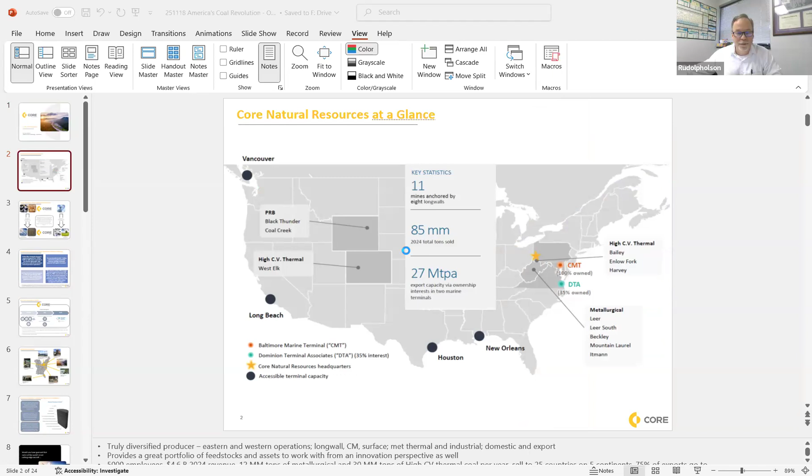Nothing's moving there. The blue wheel went away. Why don't you try hitting that presentation mode button down on the bottom again? See if it pops up. There we go, now we're caught up with you. We're on the Core Natural Resources at a glance page. Sorry for the interruption, I'll notify you as we go.

So as I mentioned, you can see here on the map: Pennsylvania, West Virginia, the ports in Maryland and Virginia, we have Wyoming and Colorado, and also some ports in Vancouver and Long Beach, Houston and New Orleans as well. Accessible terminal capacity there.

So for us as the innovations group, it really helped broaden our ability to access different types of coal, which as we go you'll start to see can be important. So you can see slide 3 there.

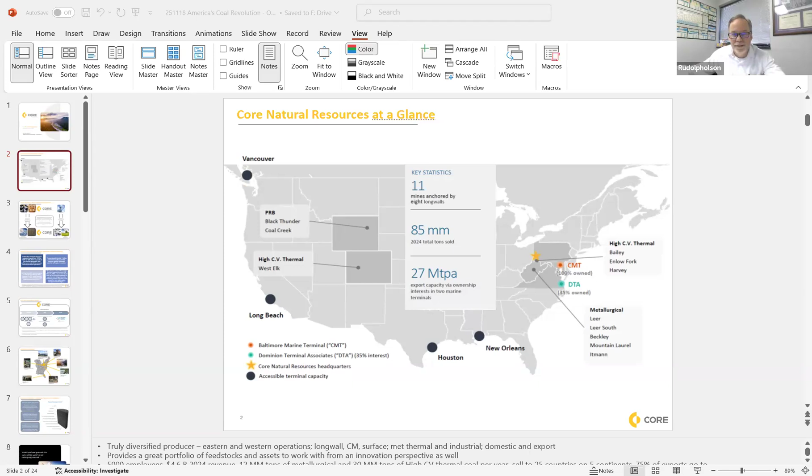Did that transition? Okay, actually not, I'm still on Core Resources at a glance here. Let's see. I wonder if maybe I keep it out of presentation mode - do you see the vision there? Yeah, now we're on vision building. So let's just go that way, maybe we'll try that way.

Okay, perfect. So the vision's important. Historically, I know Consol Energy had been around 160 years - just 1 year short of when the state of West Virginia was formed in 1863. Consol Energy got started in 1864. So what has Core, Consol, and Arch done for quite a long period of time?

Well, they've supported infrastructure development, urbanization, and transportation through metallurgical coal to make steel, and industrial coal to make products like cement and other materials. And then, of course, thermal coal provided reliable and affordable power generation.

So what is Innovations trying to do? We're elevating Core's mission by developing and commercializing new technologies that have the potential to transform how our coal and carbon resources can be used to meet society's most pressing needs into the future.

So on the left side, for infrastructure development, what are we using coal for? We're into aerospace and advanced materials, and also building products. You could see obviously some advanced aerospace planes and related, and then building products. One of our main products is a deck board, a decking composite material, which I'll be talking about.

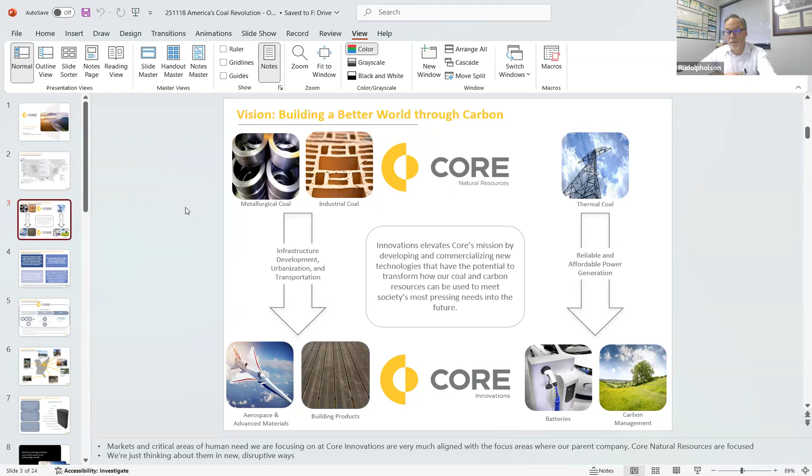So slide 4 here, using coal as a resource to tackle humanity's greatest challenges. Some of the arenas we're in: carbon fiber, composites for aerospace. That demand is projected to grow from 20 billion to 40 billion by 2035 - so that's within 10 years, going to double. It's driven especially by the need for lightweight, high performance materials in aerospace and transportation applications.

On the top right there, the world is going to need to build about 2 billion new homes by the end of this century. For perspective, that's about the number of homes we have on the planet today - so in 75 years, we're going to need to double the number of homes on the planet. Sourcing sustainable materials is going to require new innovations. It turns out if you add up all the wood, steel, and concrete on the planet and calculate what's going to be required, that's just not enough. And if you look around and ask what other materials are available at the same scale, there's just not that many. It turns out coal is one of those materials. So we're looking at it from that perspective.

Bottom left there, battery demand is expected to grow at greater than 20% per year through the next 6 years, through 2031. But it turns out the U.S. needs domestic solutions because greater than 98% of battery-grade graphite comes from China. That means anytime you see a lithium-ion battery, that anode is made from graphite, and 98+% of that comes from China. So we really need not only domestic supply, but new materials that can perform as good or better than graphite. And then on the bottom right, the voluntary carbon offset market has been projected to reach $250 billion by 2050. Coal and other fossil fuels are an essential component in even the most stringent emission reduction scenarios, but there's still a need for more viable carbon management technologies. We'll talk a little bit about that as well.

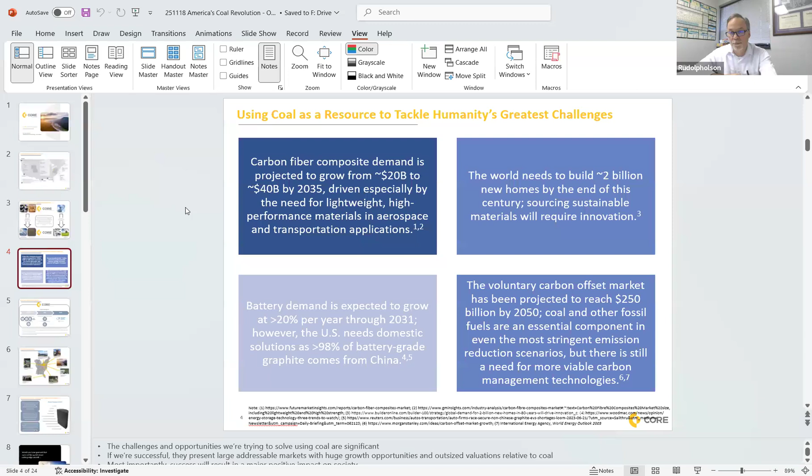So the Core Innovations model, we're an LLC that sits underneath the parent company. We're really about looking to commercialize these innovations. We're not a big R and a small D, we're really a small R and a big D. We're trying to take good ideas, innovate those ideas, but then transition to a testing stage and then a scaling stage.

So underneath the innovation stage, you can see some of the areas that we're working on. C-BATT is actually a joint development between Core Innovations and XBAT down in Florida, where we're looking to displace graphite in lithium-ion batteries using a pre-ceramic polymer / coal composite.

But in the testing stage here, you can actually see we've graduated some of our newer technologies, one being the coal plastic composite decking and the Comet methane mitigation technology. And those are transitioning to the scale stage as we speak.

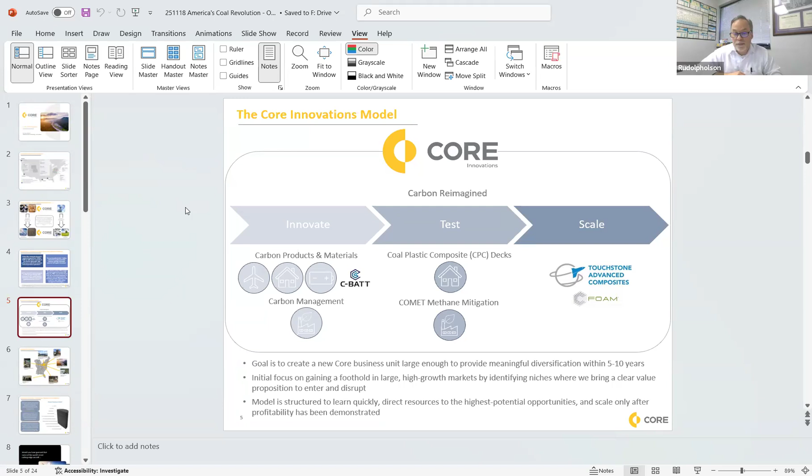A little bit about our footprint. We're largely located on the East Coast here. I think that probably is because we really started with Consol Energy. I do feel like that could graduate to the West Coast as we go now that we've merged with Arch.

You can see our headquarters is in Canonsburg, PA. We actually have a pulverization facility in Blairsville, Pennsylvania. That's the top right there, where we pulverize our coal to make CFOAM carbon foam.

Touchstone Advanced Composites is in Triadelphia, West Virginia. It's about an hour southwest of our headquarters. That's where we're making our carbon foam tools and aerospace components.

The Comet demo unit is in Richhill, PA. That technology is based on processing low concentrations of methane from coal mines. Our carbon product offices and labs are also in Triadelphia, West Virginia - it's really where our skunk works are located for developing these new technologies.

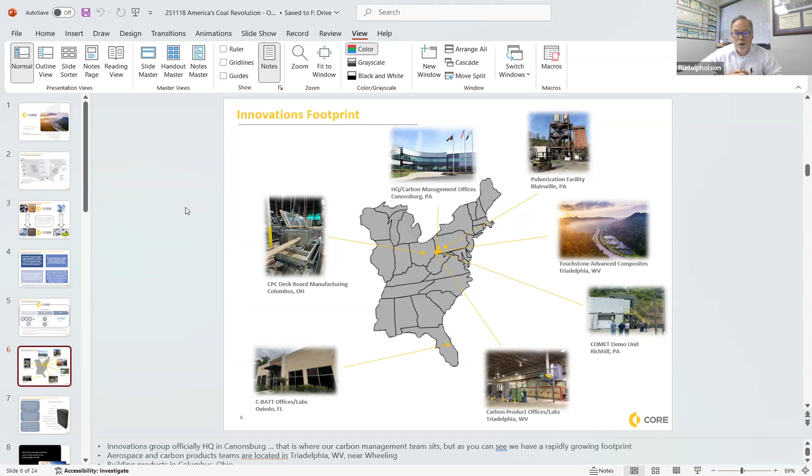Talked about our C-BATT joint development - that's located in Oviedo, Florida, just outside of Disney World and Universal there. Nice place. And then we're currently building our first commercial production line, our coal plastic composite deck board manufacturing effort, in Columbus, Ohio, through our partner Engineered Profiles. So that's really our footprint.

Before we get into some of the applications here, why coal? Coal turns out to be extremely versatile - it can be used to engineer materials, creating materials with a wide range of properties. CFOAM is an example of that.

So what do we do to make CFOAM? We pulverize coal and put it in a metal pan and cook it like a loaf of bread. We do that under high pressure in an autoclave. There are some conditions that we have to meet to make that work.

But what do we end up with? We produce a vitreous carbon foam that's fired at around 1,000 degrees C. It could be fired as high as 3,000 degrees C if desired. We end up with a product, as you can see on the right there, which are bonded pieces of carbon foam that have been machined into a half cylinder. The product has low density, it's lightweight, it's fire resistant.

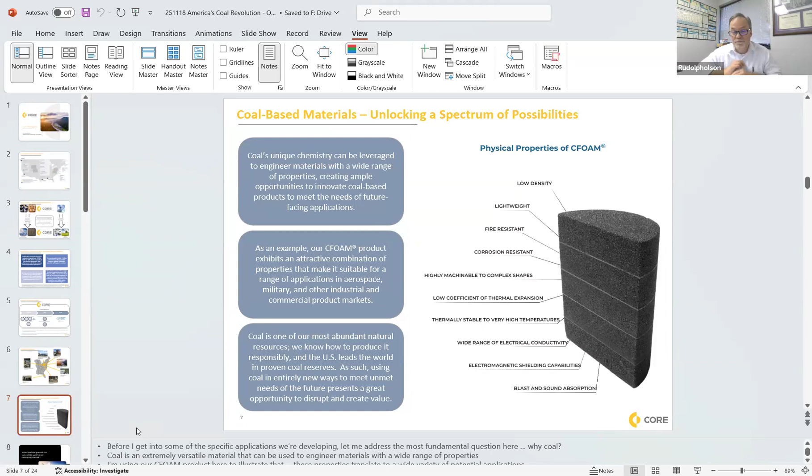So here's another example. Would you have guessed that some of the world's most cutting edge aircraft started with coal? You may have seen in the news recently, the X-59 just made its first flight. This is a plane designed to break the sound barrier without creating a sonic boom. I think there are a couple of companies working on this technology. So what does coal have to do with the X-59?

You can see in the top left a panel of carbon foam made along the lines of what I described earlier. That's basically our loaf of bread, right? The coal gets baked, it foams up, it fuses together.

Then we take those panels and create a near net shape of the object we're trying to reproduce. In the middle there, you can see we'll take that CFOAM and bond it together, just using enough to create that net shape. On the top right, you see a finished piece after it's been machined in a CNC.

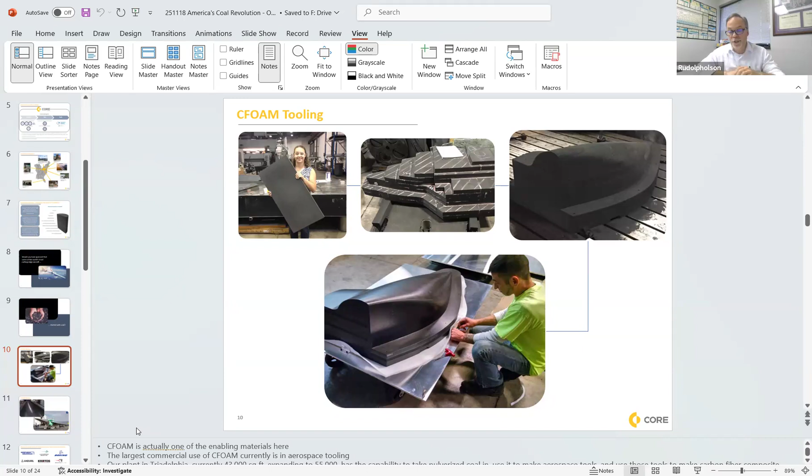At that point, the only thing you really need is a high tolerance surface. That bottom picture is the finished unit, surfaced with a graphite infused epoxy special material that also has a relatively low coefficient of thermal expansion and can be machined. Now we have a plus or minus 5 thousandths tolerance over that entire shape, which can be delivered to a customer or used here to create a shape.

And that's exactly what we did for the X-59. You can see at the top left, that's the tool used to make the nose. Obviously the nose piece is very long and thin and has to be made to very exacting tolerances, so CFOAM was the perfect tool because of its low thermal expansion.

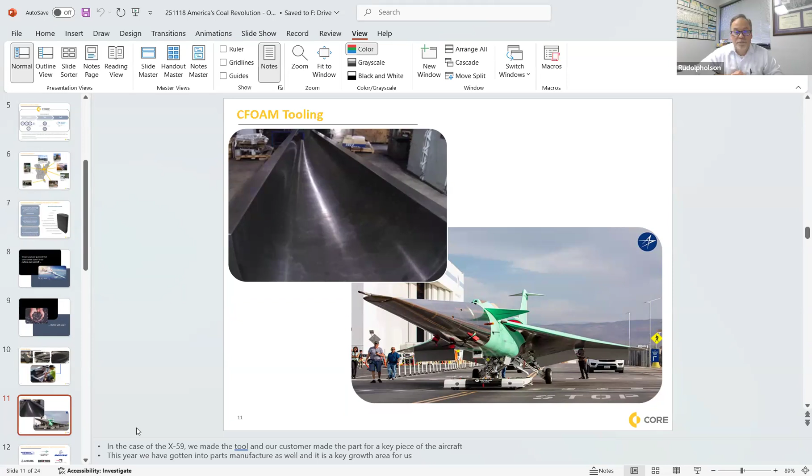And now we are looking to graduate into making parts off of those tools. We did just add a 12,000 square foot clean room onto our 40,000 square foot manufacturing facility, so that's going to grow by almost 30%. And we're looking to fill that capacity.

I'll switch over here to our deck boards. We talked about building materials, right, and the opportunity here. We're going to need to build 2 billion homes by the end of the century.

One of the products we're focusing on is a coal plastic composite. You can see on the left here, over the last 60 years, 8 billion tons of plastic have been produced around the world, but only 9.5% has been recycled. It turns out we've been able to make a composite where we've introduced coal waste fines as a filler material into the plastic. In this case, it was a PVC foam.

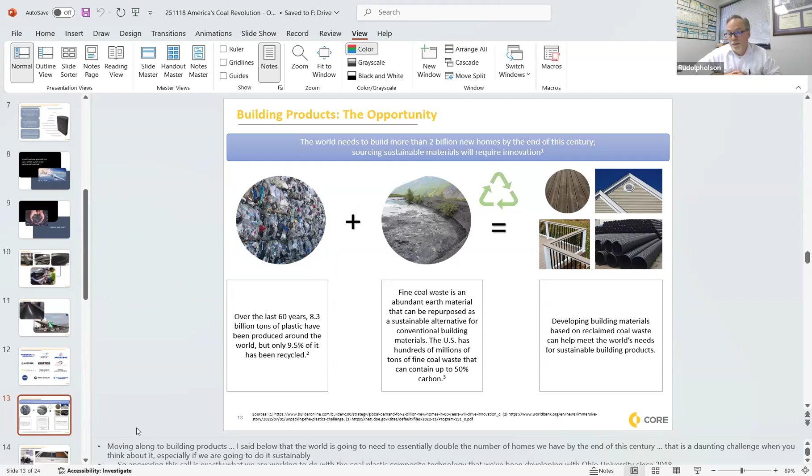And you can see on the right there, not only are we looking to do decking materials, but we're starting to experiment with piping and other plastic extrusions. A lot of this started with Ohio University several years ago, where Consol was the one supplying the proper coal and precursor materials for that research. We continue to work with OU and our partner Engineered Profiles, and we're looking to grow this concept as we go.

So you can see here on the very left, 2018, we started with beakers full of plastic and some chunks of coal. And then on the top right there, you can see how we started on the left with very small extrudates, and as you go to the right, the decking boards got better and better until finally in 2022, there you see we made our first deck at Home Innovations Center.

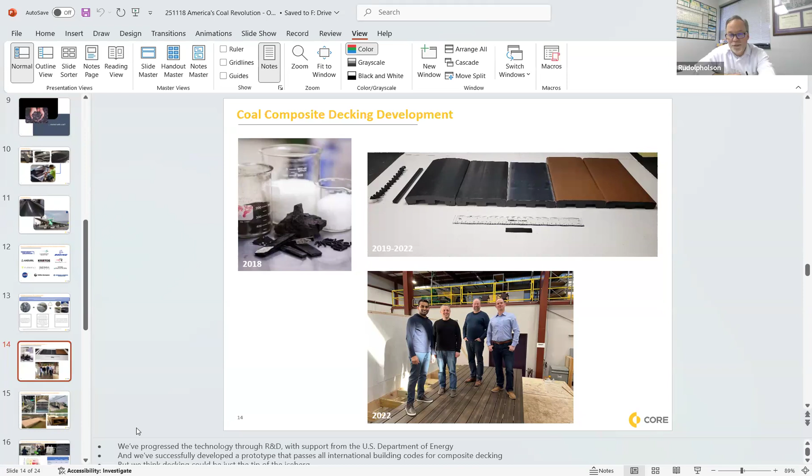But then over the last couple of years, we've gotten into manufacturing runs. You see on the top right there is a deck we built just outside of our facility. The one on the bottom left is actually a handicap accessible deck for the baseball field at West Liberty University. Bottom right, we've done a lot of work at the Oglebay Zoo. You can actually see an albino alligator peeking its head out of there.

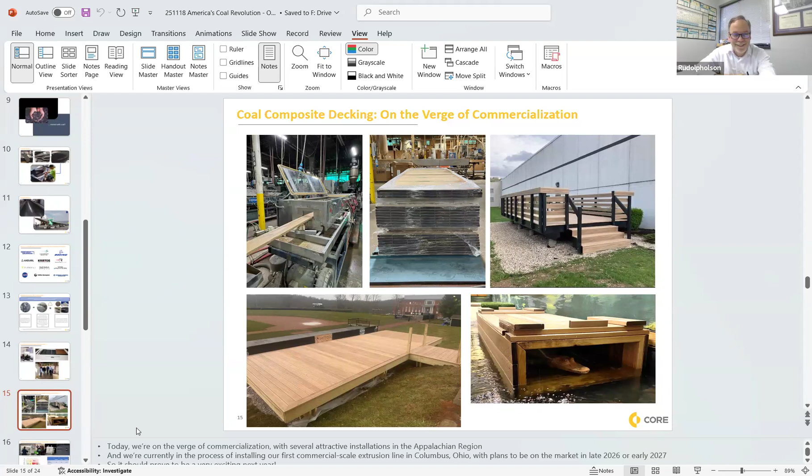We're testing exposure to water, how it's going to hold up over time. The albino alligator makes kind of a nice picture. But yeah, really excited about that product. And we hope by the end of 2026, we expect we potentially have the capacity for about 2.5 million linear feet per year by the time we're done.

Talked a little bit about batteries, our C-BATT effort. And graphite is actually in the danger zone for the US DOE Material Criticality Matrix 2025. You hear about all these rare earths, neodymium and related dysprosium. Well, graphite is right in that same spot.

So this effort's actually - it turns out coal, when added to pre-ceramic polymer to create silicon oxycarbide carbon-rich materials, it improves the performance of the silicon oxycarbide glass to the point where you see on the chart to the right there, we're calling this new material Obsidia, which we've trademarked.

When you start to compare it to graphite and to silicon, we have some terrific properties. The specific capacity is not as high as silicon, but it doesn't have the volume expansion issues that silicon has, and it also has a very low cost. We can fire this silicon oxycarbide material at much lower temperatures, and then of course utilizing coal, we can reduce that cost even lower. So we're working to scale that material up, and we've already made batteries.

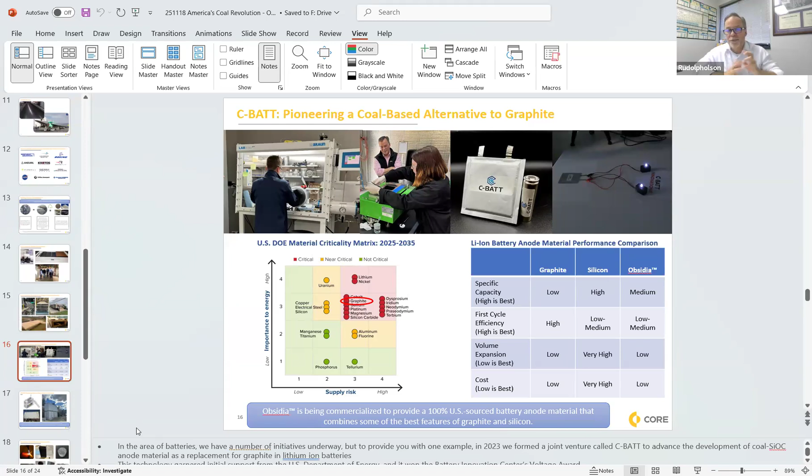You can see on the top right there, it's actually a pouch cell that contains waste coal fines. And there you're showing the pouch cell. It's about what you'd use in a cell phone. And there it's just an example where it's powering some LEDs. This one, I can't say too much about it other than I'm a little bit unfamiliar, but our guy Steve Winter in our innovations group is the guy who's heading up this project.

Basically, we are looking to process the low concentration methane that comes from mines. I think from my simple perspective, the high concentration is kind of easy to deal with because you could just flare it. So low concentration gives you the trouble. And working with our partner Johnson Matthey, really using more of a catalytic approach, we're successfully implementing this technology. I believe it's potentially applicable to over 125 U.S. mainline air shafts with an average methane concentration of about 0.2%.

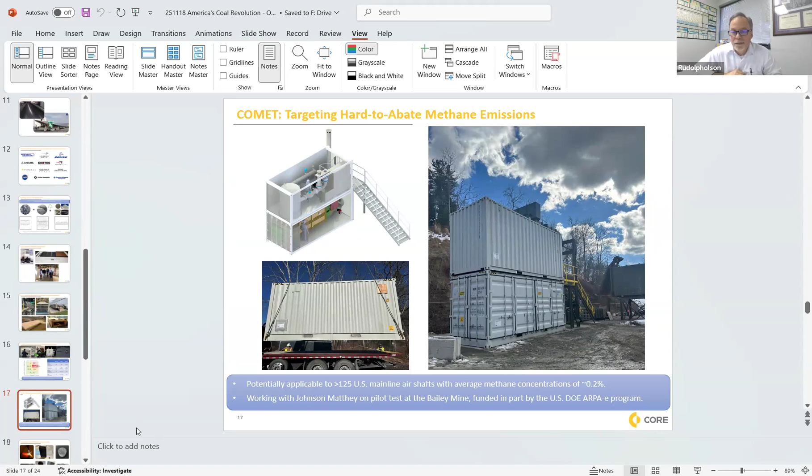So we are working with Johnson Matthey at the pilot test site at the Bailey mine, and this was funded in part by U.S. DOE ARPA-E program. And you see on the right, that's a real picture. This unit is functioning, working out the bugs, and feel like by the end of this year, maybe another 6-7 weeks, we're really going to lock the process down and consider our next steps in 2026.

So with that, these are some of our main examples, but we still have a robust pipeline of opportunities. I guess that's one of the dangers, you're often not short of ideas. You really have to manage the ideas, make sure you don't go a mile wide and an inch deep.

But same token, if that's the job we're trying to do, is innovate. You can see on the left that example I was talking about: high temperature torch, acetylene torch, the CFOAM's just not going to melt. There's some really interesting high temperature applications we're in. With Ohio U, we actually developed a coal-based 3D printing technology, one where not only could we print plastic, but we could also print a carbonizable precursor to create 3D printed carbon objects that could survive to 3,000 degrees C.

On the right there, we actually created a novel carbon aggregate. Thinking there, you've probably seen on 60 Minutes or elsewhere, these 3D printed homes. One of the issues is you really have to control the rheology of the concrete. It also turns out 3D printed homes don't rely considerably on the strength of the concrete because it still uses steel as its infrastructure. So what you really need is well-controlled, lightweight, good rheology control in your concrete. So what we created was a lightweight carbon aggregate, similar to some lightweight aggregates out there today, like in High Point, North Carolina. We're looking towards this as potentially a very high volume building product, could potentially use waste coal fines to make it.

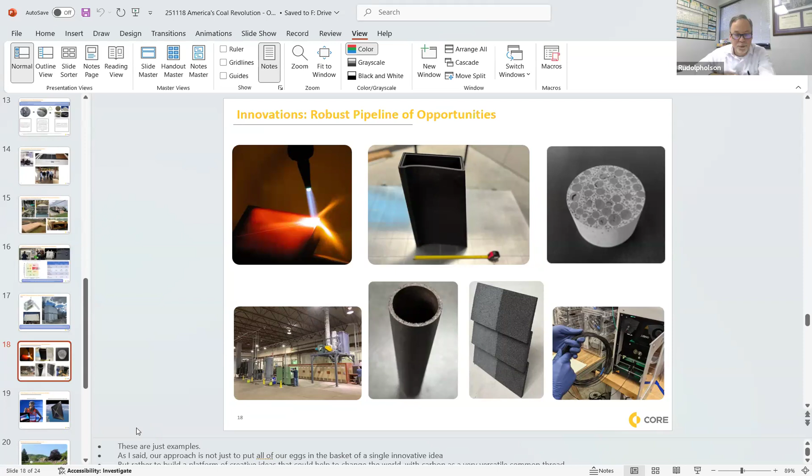A couple others: in 2024, we actually took part in two of Time Magazine's 200 Best Inventions of 2024. If anybody watched the Paris Olympics, it turns out the gold medal winner for the women's marathon broke a new Olympic record, and was actually wearing a graphite foam Ohmius headband that contained our graphite foam in it.

And then on the right, the NASA solar sail, those carbon fiber composite booms that unrolled the kite, were made on CFOAM tools. Again, very long and skinny, very thin carbon fiber structures. They had to be made to very exacting standards, and it turned out CFOAM was the right tool on which to make that product.